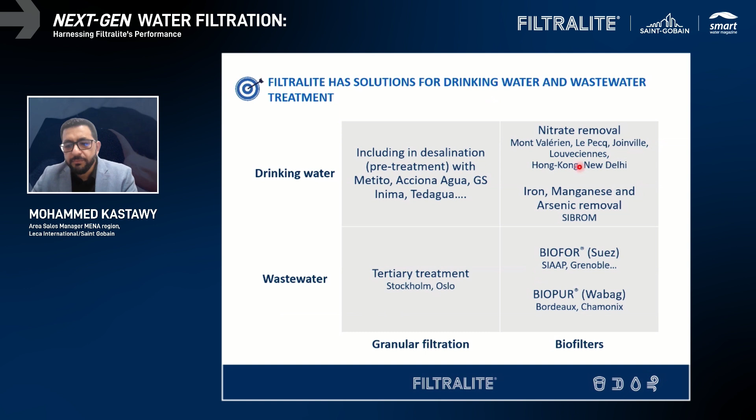Our first point as a challenge is the retention of sand. As we know, sand is mainly a solid part, so its retention capacity is very low compared with Filtralite. For filtration rate, it's mainly between 4 and 12 meters per hour, so if you want to increase production, you're limited to 12 meters per hour. Also, for both solutions, we see a challenge with the high head losses during operation caused by this media, along with expensive OpEx for operation, and intermixing layers. The bulk density of sand is around 1,600 kilograms per cubic meter, and for anthracite, it's mainly 800 to 900 kilograms per cubic meter.

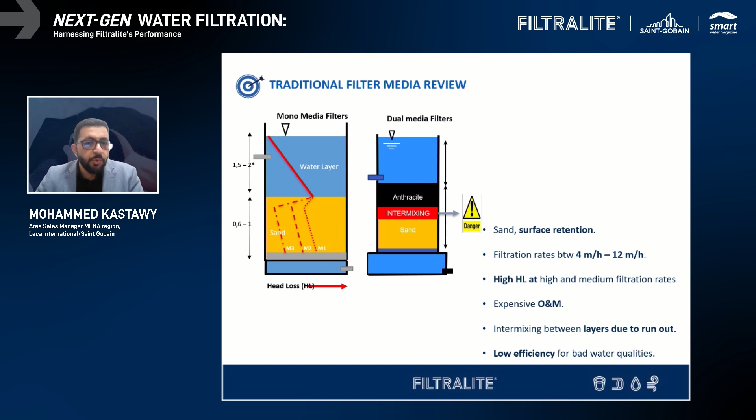So what can you expect when you want to change? First, let's talk about the optimizations and improvements that you can expect. First point, if you have sand, anthracite, pumice, or any other kind of media working in a sand filter, you have to know that it's very easy and quick to remove it and use Filtralite. So you don't need to change anything in your plant, just remove the current media and install Filtralite.

When it comes to filtration rate, as we can see here, it's up to 20 meters per hour. That means you can increase the production of your existing plant. But at the same time, when you are using other media, you can expect frequent clogging, and this issue can be solved by Filtralite. We will explain in our presentation how we can solve that. Of course, doing a lot of backwash means using a lot of frequent water in the washing, which will end up losing a lot of water. So also this part you can save.

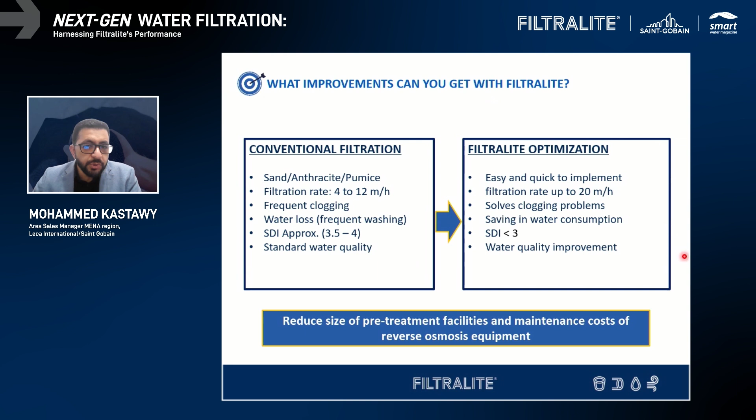When it comes to SDI in desalination, you can also expect a better, lower number of SDI, and this of course will cause better water quality. So this in total is what you can expect. But let us just jump to what is Filtralite and how we are manufacturing this media.

As we can see in this picture, Filtralite is made from clay. The main raw material for Filtralite is clay. We choose this based on purity, particle size distribution, and other qualities to assure product quality. This selected clay is crushed and stored. We dig it from the ground, crush it, and store it into fine particles to make lightweight aggregates. Once the clay is ready, it's mixed with water and other ingredients to make sure the end product is better.

Then it comes to the heat treatment, where we have a rotary kiln, like a furnace, where we heat the media inside up to 1,200 Celsius. Then all the organic material inside the clay turns into gas and evaporates, and the clay expands. As you can see here, 1 cubic meter goes inside the furnace and ends up as 3 cubic meters. So you get expanded clay, and at the same time a lighter media.

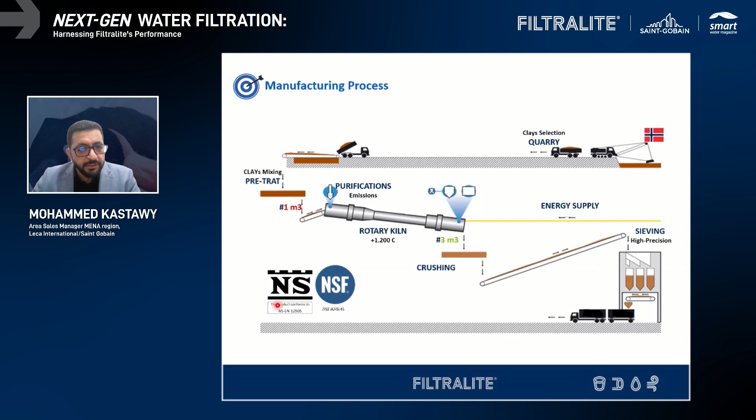Then it goes to the cooling part, where you cool this media to ambient temperature, and after that you crush or screen it to obtain particle size distribution. So at the end, we get different particle sizes as grain size and different densities. Then it goes to quality control, where Filtralite is quality controlled through the manufacturing process to meet water filtering and other criteria, evaluated by our team to make sure it has very good quality. Then we do the packing and delivery. When it comes to the desalination part, we hold an NS and NSF certificate for Filtralite Pure.

This picture explains how Filtralite is a unique media compared with other media, showing the benefits of using Filtralite. As you can see here, Filtralite has higher porosity compared with sand, which gives you more storage capacity in terms of running the filter for a longer time before you stop and do the backwash. The reason is that you are using the depth of Filtralite in a much better way than sand, because with sand and anthracite it gets clogged in the top layer. As we saw in the previous slides, you have anthracite on top and sand in the bottom, and then you get clogging from the top layer.

With Filtralite, you can avoid that because you are using the whole depth of the media due to this porosity, as you can see in the picture. At the end, you will have less backwash, meaning less energy consumption. It's especially an ideal solution for projects or sites where the customer wants to produce more water. By using Filtralite, they can increase the production of the plant without increasing the number of filters. We're going to see some live cases for this.

Also, as we know, this high porosity is a good feature that will allow you to remove more suspended solids, and of course this will affect your backwash, as we said.

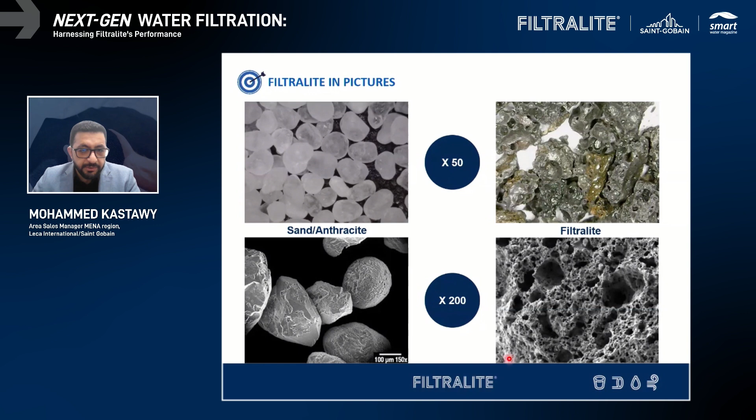So in terms of OPEX and CAPEX, I'm putting these in two terms because we can target new plants as well as current ones.

If you are an operator and want to save OPEX in your current plant, which is already in operation, by using Filtralite you can expect 2 to 4 times less backwash. So you will get a higher filtration rate, meaning more water in the same period.

In case of the RO plant, you will have more stable biological water coming from the filter, which means less biofouling to the membrane. Then you can increase the lifetime of your RO membrane. Of course, you will have less cleaning and replacement of the cartridge.

At the same time, you will be allowed to have more suspended solids in the feed water, which gives you also a longer time before you need to stop and do the backwash.

But let's say you are a new customer building a new plant and you are caring about CAPEX. Then again, Filtralite is an ideal solution because, as we said, you can expect to increase the filtration rate. So instead of using 10 filters, you can use 6 or 7 filters. That means less footprint, saving in backwash, concrete and steel.

Also, because Filtralite is a lighter media compared with other media, you can use a smaller backwash pump. Of course, this will again impact your energy consumption. So that's in terms of OPEX and CAPEX.

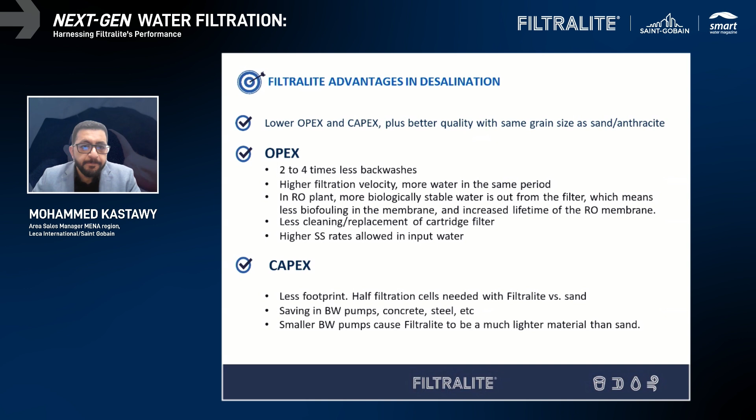So what are the solutions and how can we give you Filtralite as a solution? We can provide you two options. The first one is to have one layer of Filtralite.

As you can see on the left side of this picture, this is mainly recommended for a depth of up to 1 meter or 1.2 meters. But if you look to the right side and you have a depth of more than 1.2 meters, let's say a 2 meter media, then in that case we can provide you with two layers.

As you can see here at the bottom, you will have a layer with a smaller grain size but higher density. And in the top layer, you will have exactly the vice versa: lighter density but with a bigger grain size. So you have the coarse layer and the fine layer.

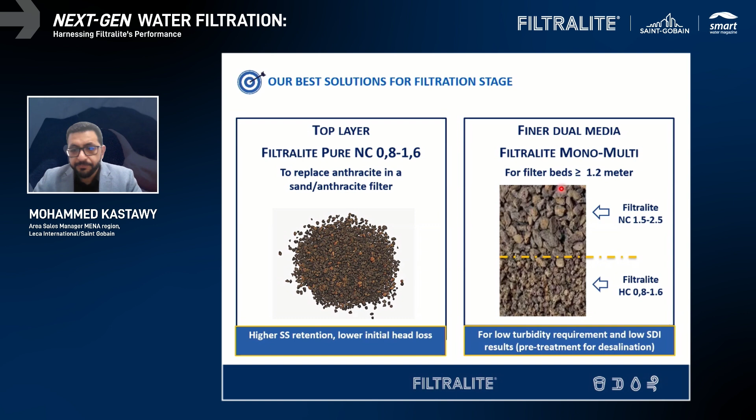In that case, you are using two different grain sizes, two different densities, and this is how you can overcome the intermixing layer that we saw in the previous slide. So you stop the backwash, and then the bottom layer with the higher density goes down first, and then the lower density with a bigger grain size on top. This is how you can keep the same performance of your filter.

So let's see now - and I'm sure this is a question I get many times - okay, I want to see how Filtralite is performing against other media. It's an important question, and the customer has the right to see, when making this investment to change to Filtralite, what kind of performance he can expect.

So what I'm going to show you today is 4 different cases, and all of them are done by a third party, not by us - either an engineering institute or one of our OEM customers. The first one we have is from Ingopras. In that case, it's a very important case for the customer who's looking to see the turbidity or suspended solids.

So here we have two ideal comparisons. One, Filtralite with a grain size 0.8 up to 1.6, combined with sand 0.4, 0.8. And to have a fair comparison, we did the same exactly. We choose the same particle size, but instead of Filtralite, we choose anthracite with the same grain size 0.8, 1.6, again combined with sand 0.4 and 0.8.

And we did this experiment in different strategies. First one was using an input suspended solid of 80 milligram per liter, and we choose different filtration rates: 8 meter per hour, 15 meter per hour, and 20 meter per hour. What are the parameters we are going to measure? First one is the turbidity, NTU, and the suspended solid.

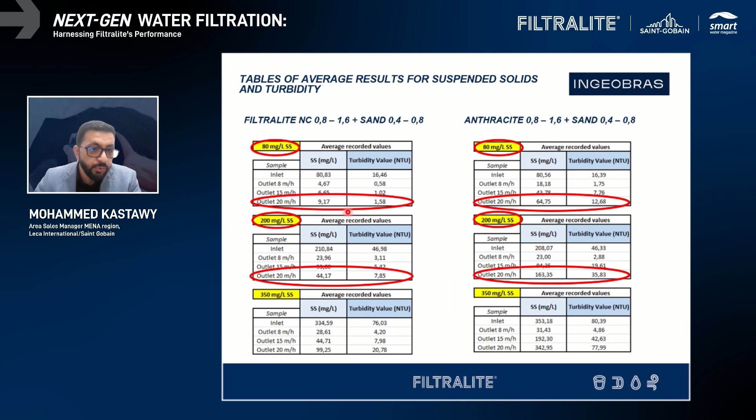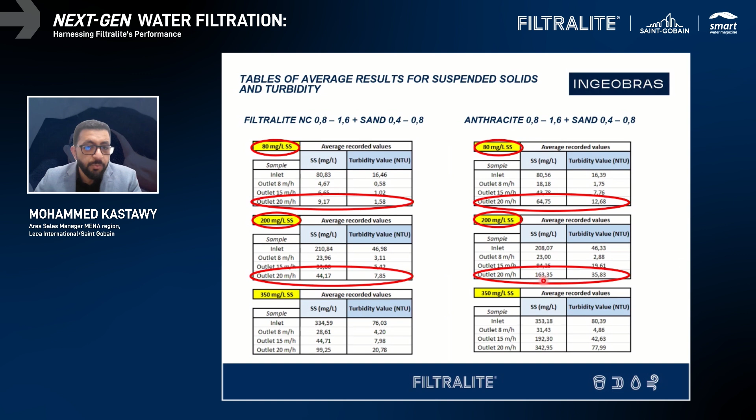And this gap is going bigger when we increase the suspended solid, or when we did the test at a higher suspended solid. Like here from 200, it dropped to 163 with a turbidity of 35, while here it dropped from 200 to 44, so from 163 to 44. And again the turbidity, we are getting a better turbidity, from 35 to 7.5, so 7.8. Again for the 350 milligram, the same.

And in this one, the gap is going even bigger. From 350, it dropped to 343 almost, with a 78 turbidity, while here it dropped from 350 to 99, with a turbidity of 20. So in all cases, we are getting a better turbidity, better quality of water, and at the same time we are reducing more, or storing more suspended solids in the filter.

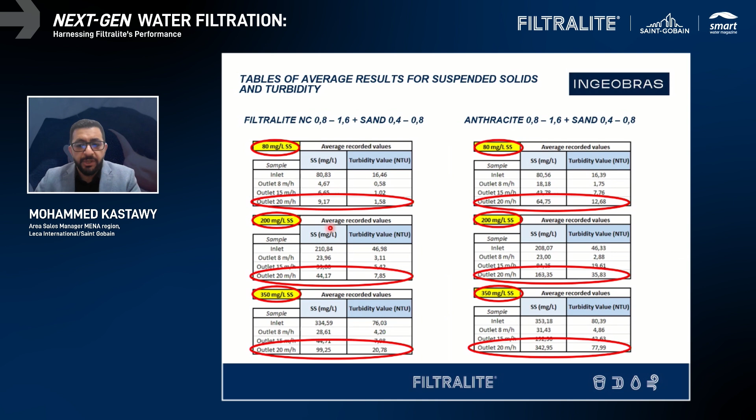Case number 2 is done by Suez, and all of us know Suez very much, one of the biggest OEMs globally. So Suez did an experiment. They had 5 columns, and they wanted to check the turbidity and UFRV. Let's start with turbidity.

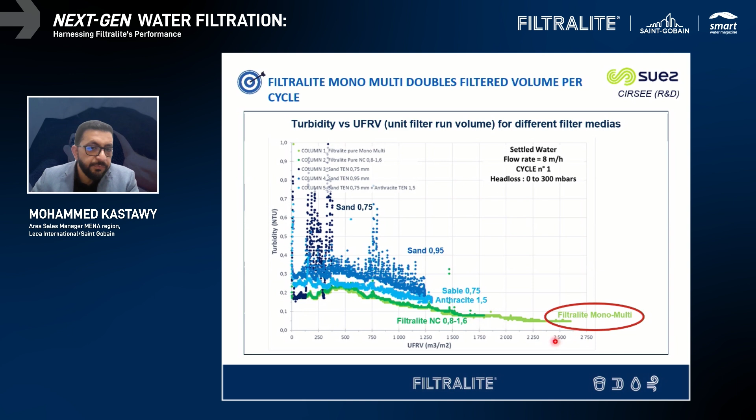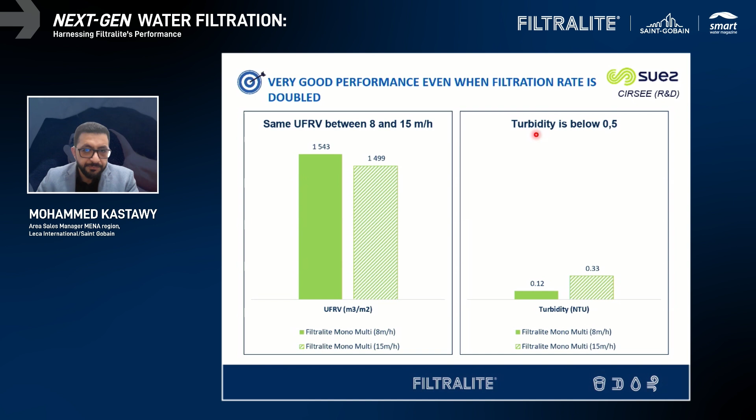That means you are doubling your production of your plant. And in that case, Suez wanted to make sure that the turbidity you are getting is better. So they put this as a benchmark to have below 0.5. And even when we increased the filtration rate from 8 meters per hour to 15 meters per hour, we still score 0.3, which is below the 0.5. So we are getting good quality of water, and you are doubling your filtration production.

Goes to case number 3, done by CPERI. This one was done in Spain, in a desalination plant in Spain. You want to see how Filtralite is performing for TOC removal, the total organic carbon. And as we know, it's a very important aspect, especially in the desalination process and in a system utilizing reverse osmosis or other membrane technology.

So with TOC in the feed water, it can cause fouling and scaling of the RO membrane, leading to decreased efficiency and increased operation cost. So this is very crucial when it comes to reducing TOC. In that case, they had a TOC average with 5 meters per hour. Using sand and anthracite, it was only able to remove 37%. While using Filtralite, it was able to remove 50%.

When we increased the filtration rate from 5 meters per hour to 15 meters per hour as an average, it was only 26%, but with Filtralite, it was 40%. So this is how much you can increase the amount of TOC removal in your water.

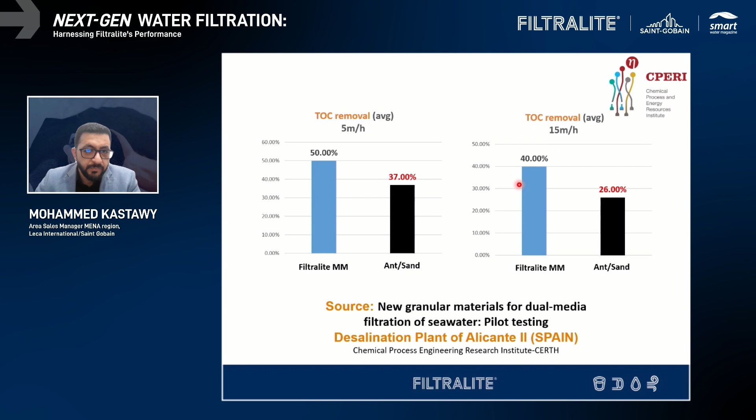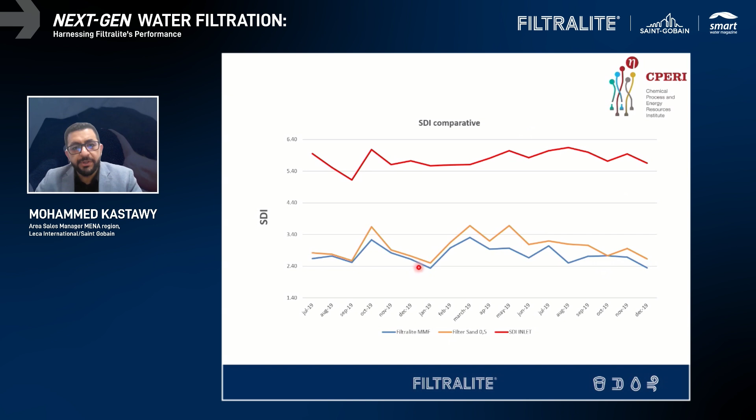For the fourth case, done by Suez again, they did something called a friability test. One of the very important points about Filtralite is how many years you can use it. In our operation manual, we say that if you use Filtralite with the right backwash protocol, then Filtralite can last for 25 years.

And I was surprised to find that we have some plants that have been operating for 30 years, still running today. So how can customers measure that? We did this friability test, using almost the same particle size, comparing Filtralite with anthracite and pumice.

That means 325 full rounds, full circles. And then again for 30 minutes with 1,500 strokes. So practically they are making this particle hit the media inside the cylinder, to see how much this media will be impacted by this element and the solid parts.

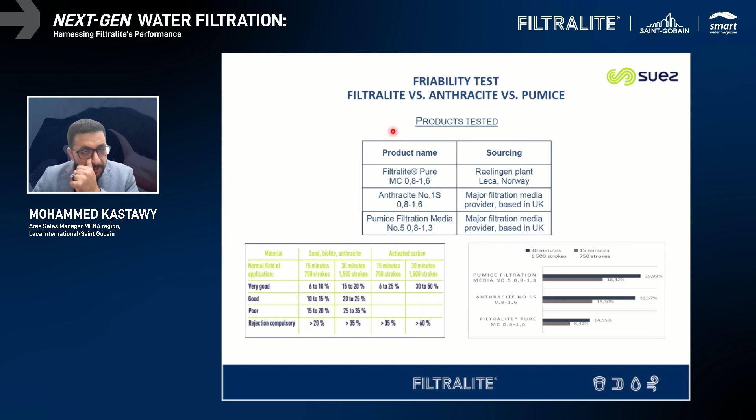We can send you this experiment; just click the link and it will take you directly to the Suez website, where they have all the information I mentioned, and you can see all the results. This was our first case showing Filtralite's performance against other media.

Now let's talk about references. As Alexander mentioned, I'm based here in the Middle East, and let me be clear: we have around 700 reference plants globally, either desalination, drinking water, or wastewater, that have been running with Filtralite for many years. So it's not a new product or a new company, but we are now taking our first steps in the Middle East. Fortunately, we now have some references here too, so I'll explain the global references.

These references, whether in the Middle East or globally, are available upon your request. Whenever you request it, you can send us a message and we will send you full information about these plants: how many years they've been running, which exact model is used, who the customer is, and what type of plant it is.

Let's go to the first case study: Thames Water in London. The customer had a major problem with water quality, especially from July to November, due to a high number of algae in the water. They also wanted to increase the plant's production capacity. This was in 2001, when London's population increased and Thames Water was asked to increase the plant's production.

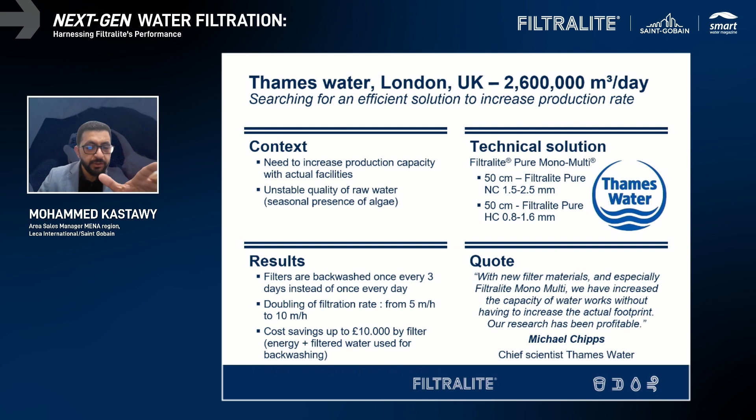Just imagine how much they are saving these days with the increase in electricity costs. Of course, we have all these cases fully documented in reports done by our customers, so you're most welcome to ask and we will send you the full details.

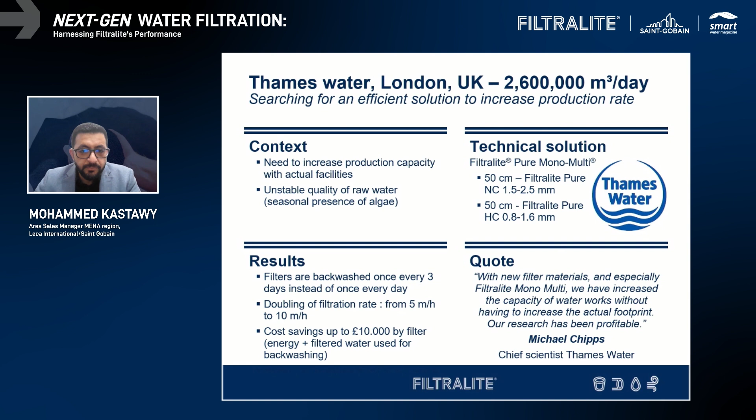Now let's move to the next one, which is Veas.

I've been there myself last December, and this is the largest wastewater treatment plant in Norway, with a capacity of 100 million cubic meters per year.

This plant was built in 1984. In 1994, after 10 years, they had a problem: the plant is built under the mountain and they have very limited space to increase the number of filters. Meanwhile the population in Oslo increased, and they wanted to increase the plant's capacity.

So in 1994, they decided to go with Filtralite, which allowed them to increase the filtration rate. We have a huge record in terms of long-term lifespan, because this plant has been running since 1994 until today—that's more than 30 years—and it's still running with the same media.

We also have a full report about this one. You're most welcome to ask about it.

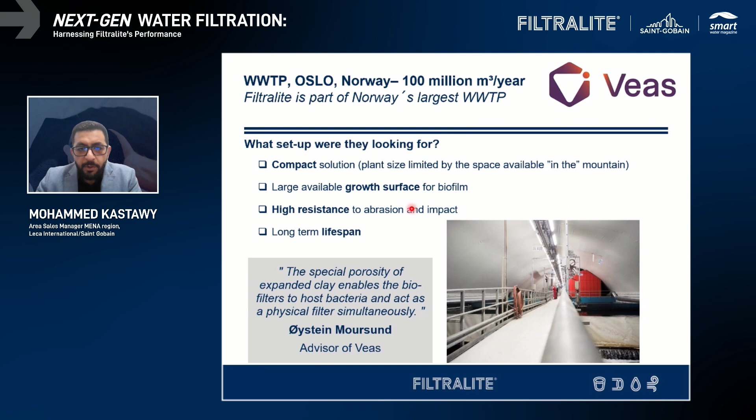The third one, we had a full-scale case done by Acuamed in Spain, in a desalination plant pretreatment. They wanted to measure the consumption of backwash and the number of backwashes during the month.

So let's take this as our benchmark for sand—call it 100 as the consumption of backwash. With sand and anthracite, you're able to reduce it from 100 to almost 75.

But with sand and Filtralite—and I'm highlighting this, sand and Filtralite, not only Filtralite—they were able to reduce it from 100 to 30, almost 35. That means around 65% of backwash consumption is saved, which goes straight to your production in the plant. So just imagine that, with sand and Filtralite.

This is a very good point, and I want to echo it again: Filtralite can be used with sand, or alone—as I said in the beginning, either one layer with about 1 meter depth, or two different layers with different densities or grain sizes if you have a bed around 2 meters or 1.5 meters.

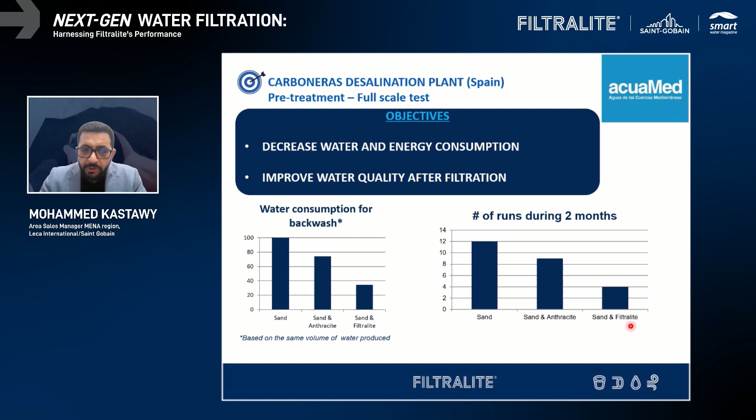In terms of backwash, again, it was 12 backwashes with sand, and with sand and anthracite—almost 9—while with sand and Filtralite it's 4. Of course, you can use sand with Filtralite as a solution, or get the optimum result using only Filtralite, like we saw in the experiment done by Suez, with the light green line and the dark green line.

The last one is the Beni Saf desalination plant, done in Algeria in 2020. The capacity was 200,000 cubic meters per day. They had 48 filters. The water losses in 4 months were around 673,000 cubic meters.

It was only allowed to get and feed water with suspended solids up to 25 milligrams, and then they had to stop and do the backwash because it got clogged. So the first stage was in 2020: they changed 24 filters, and the water loss dropped by 45%. On the other hand, the suspended solid limit increased from 25 milligrams per liter to 40 milligrams per liter.

At this stage, the customer decided to change the whole set of filters. So they changed it, and now the suspended solid allowed goes from 25 milligrams per liter up to 70 milligrams per liter, and the water loss decreased by 85%. This plant's capacity is now 300,000 cubic meters per day. It's been running for 4 years now, done in Algeria.

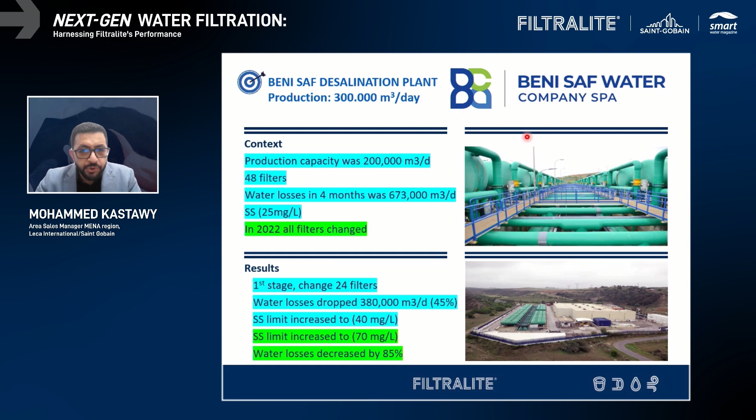I hope I didn't go very fast. Now I want to close with the conclusion, to give our attendees time to ask some questions.

The conclusion: in many applications, it was the best solution to use Filtralite. As I told you, it's now running in drinking water and desalination plants—more than 400 plants—and wastewater plants—more than 300 plants, some of them since 1994.

It's very direct and easy to replace, so you don't need to change anything in your plant—just remove your current media and use Filtralite. Or if you're building a new plant, you can save, as I told you, in terms of capex, by reducing the number of filters.

It allows you to increase the filtration rate by 50%. Sometimes, as we saw in the case with Thames Water, it was double, and it can reach up to 20 meters per hour. It solves your issues with fast clogging or poor quality, gives you more time to run the filter before stopping for backwash, and solves the issue of short lifespan, so you don't need to change it every 5 or 10 years.

Especially for companies thinking about this project like a BOT or BOOT, they care about how much time they'll change the media during this 25 years, 30 years. You don't have to consider that or be concerned about this point.